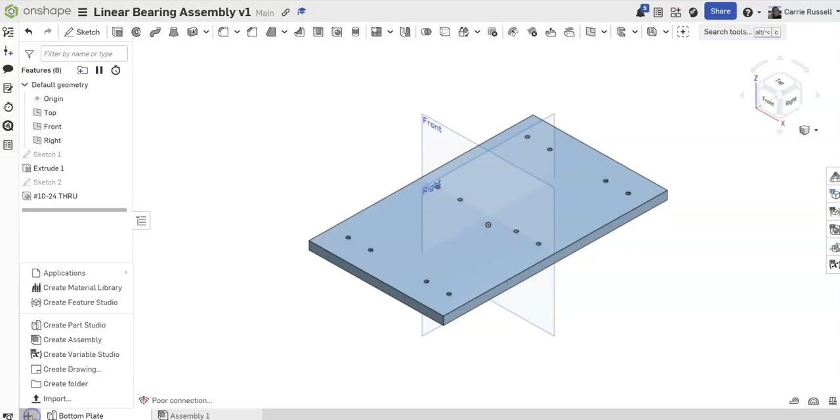Welcome back. We're continuing to work on our linear bearing assembly, and now that we have the bottom plate, we're going to go ahead in our same part. We're going to hit the plus key on the bottom here and create a new part. By the way, we can rename it while we're down here. This is going to be called our guide shaft.

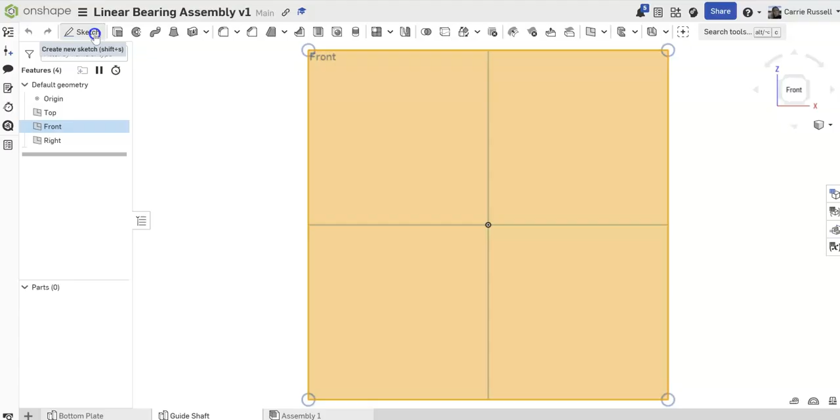This will be kind of the rails that the bearing assembly runs on. We're going to look in the front plane here and create a sketch. We'll go ahead and rough in this part, and I'm actually going to do a corner rectangle here, and we'll kind of see the profile here in a second.

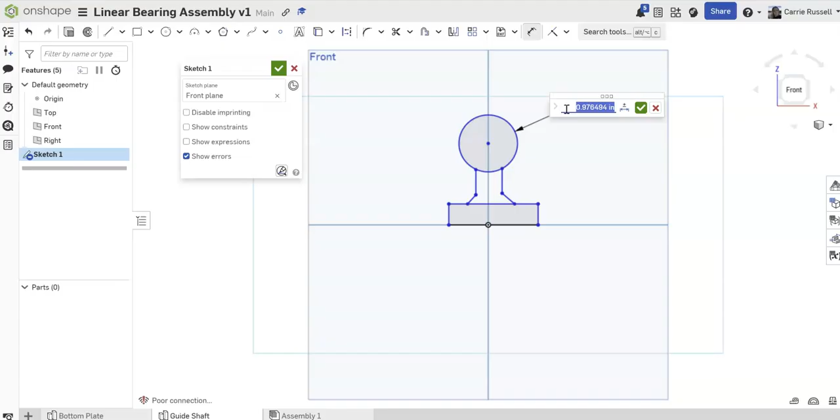Just adding in some features. Okay, so we got a lot of work to make this look the way we want, so let's just make sure first of all that you have some relationships in here. This should have a tangent, as should this. So that means this part should be coincident to that, and these should be coincident. I think that's good. Let's go ahead and give this circle up here a diameter of 0.5.

And we'll start dimensioning some of our part here. The bottom plate, going from the center of the circle to the outside edge here, is going to be 0.75. And then the same will be true on this side as well, 0.75.

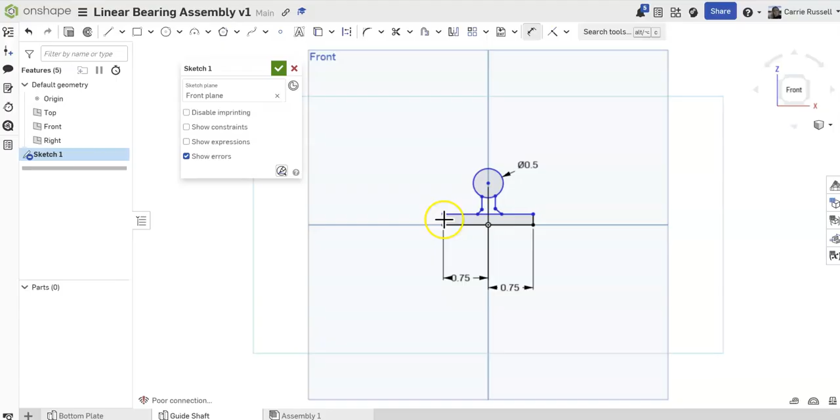This edge here, I'm going to zoom in, is going to be 0.25. Going from the base up until the center of the circle will be 1 inch. Starting to get there now.

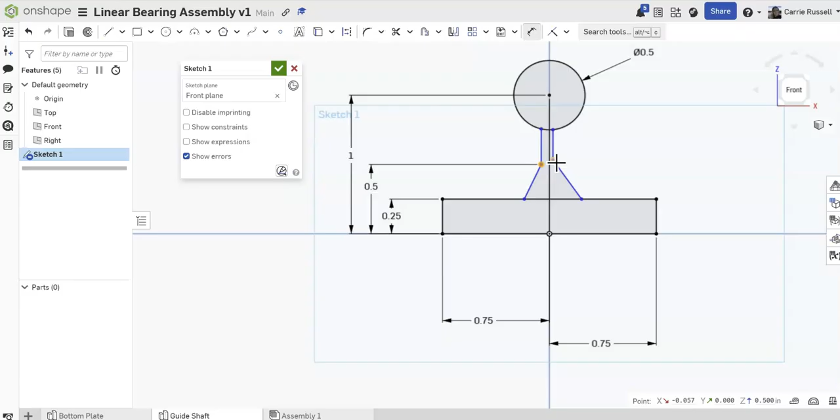And then I'm going to make sure that part here, that those are touching. You can at any time fix some of this stuff as you need to. I'm going to add another dimension from where that angle ends to the base, is 0.5. And we want this part and this part to be, sorry, these two points to be horizontal.

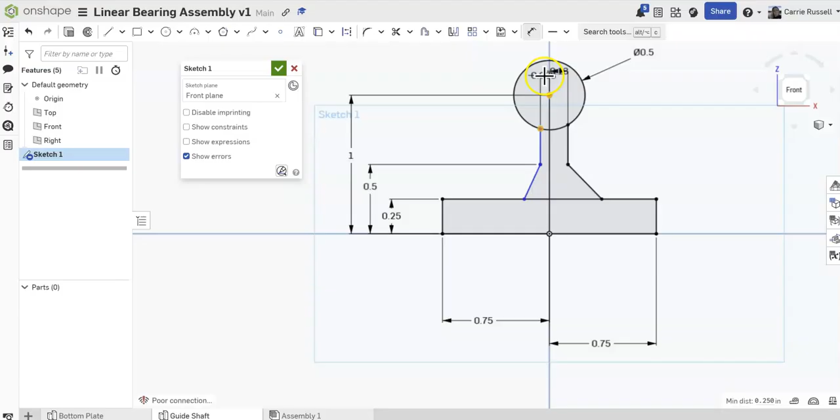We're going to go from, let's put some more dimensions, from the center of the circle to this point. Sorry, I want the dimension here. That's going to be 0.13. Same on this side, that will be 0.13.

As we get close now, we're going to create an angle. So there's a dimension that goes from here to there. That angle is going to be 30 degrees.

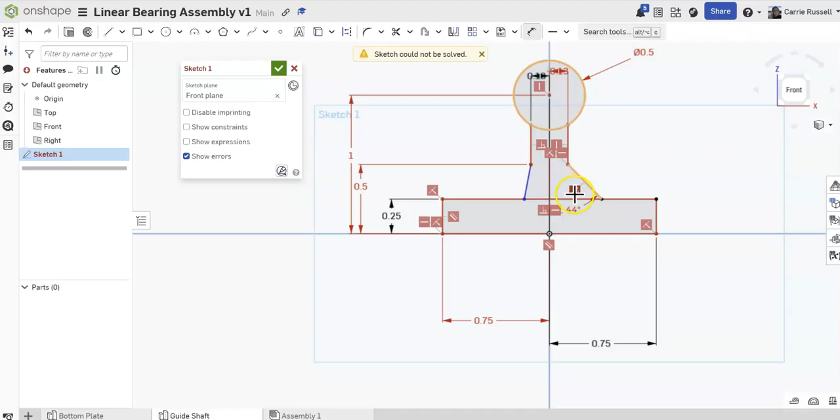See what it's mad about? I think it's mad about this tangent, so we'll get rid of that relationship. But we're going to put the same dimension then from here to that line. That will also be 30 degrees.

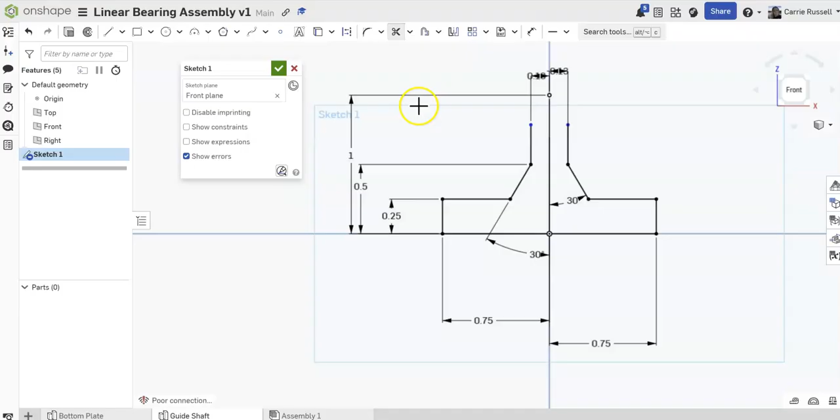And as we're getting closer, we can go ahead and trim out some of these pieces in here, and we'll take a look and see what other dimensions we need. So I think this is all we're going to need to do. Oop, didn't mean to cut that. It's in my tool. I'm just trying to move some of these dimensions out so that you can see this profile.

We're going to go ahead and extrude this shaft. This is going to get extruded 10 inches. And there is our guide shaft.

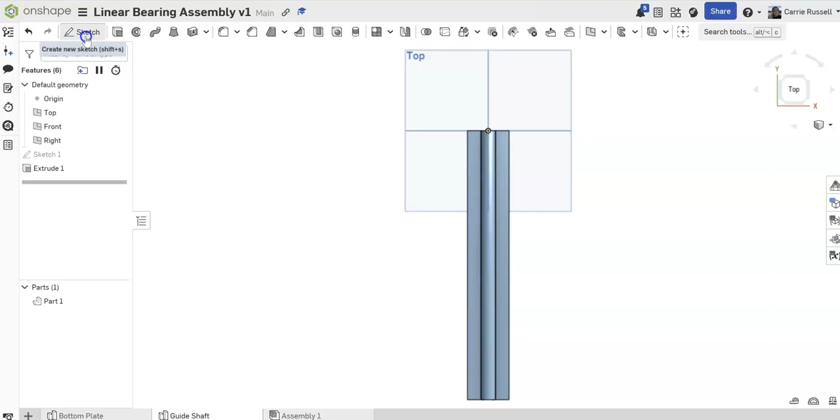And then we just need to drill some holes in this so we can mount that to the base plate. These can be just regular through holes. So we'll go ahead and create a circle pattern here. I'm just going to put one on there now, and I'll go ahead and dimension that to 0.22.

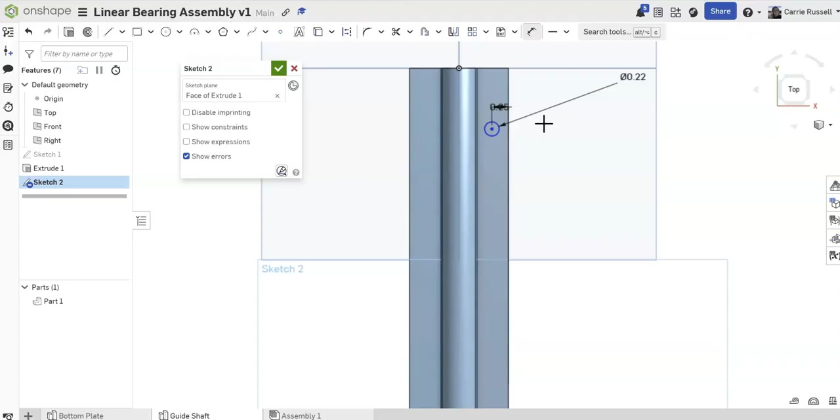And then I'll get a little closer so you can see, this is going to be from the center to the outside edge, 0.25. And then from center to the back edge, 1 inch. And now we can kind of make a linear pattern.

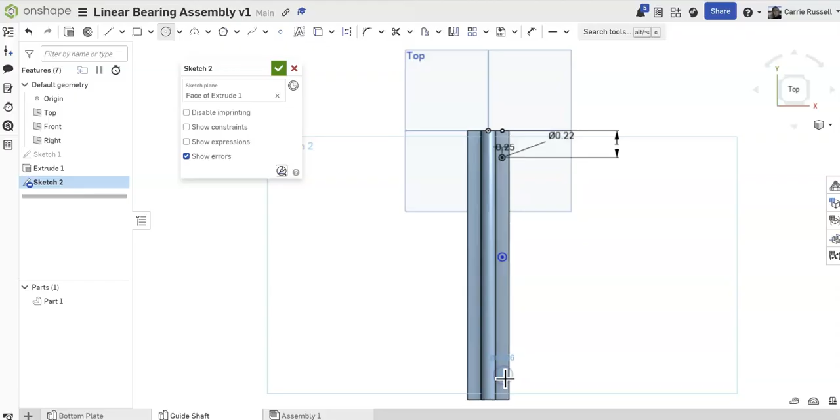We can kind of do the same thing here and here, so let's go ahead and dimension these. Again, this one will be 0.22. We can reflect this over too. 0.22. Both of these should be also.

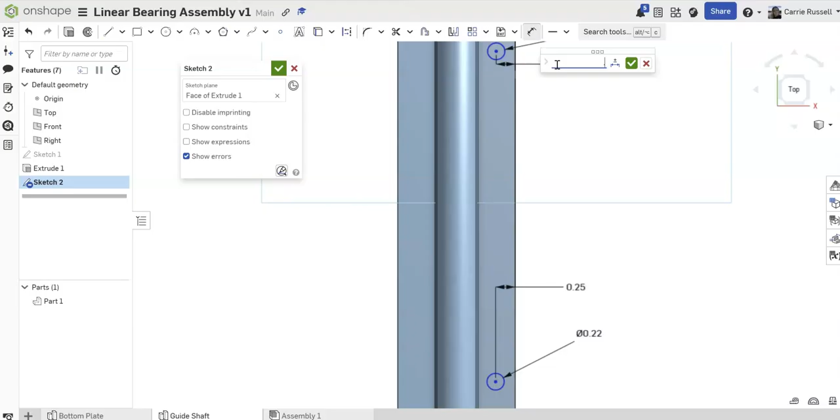And then the dimension between them is actually going to be 4 inches. Let me zoom out so you can see the dimension between this point and that point will also be 4 inches. And then those 3 holes can be mirrored.

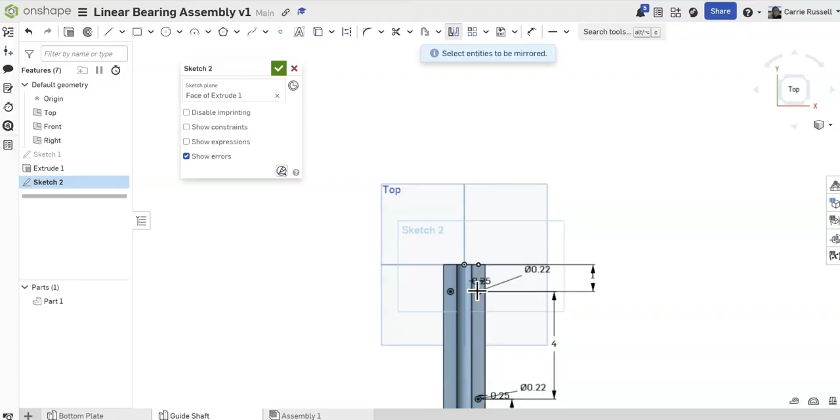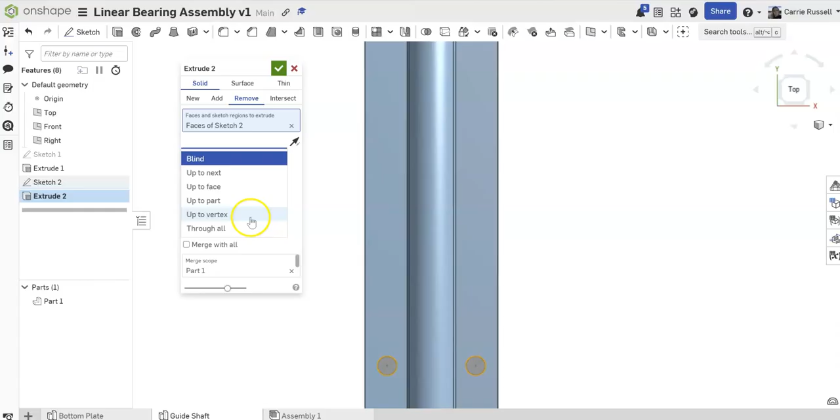Oops, sorry, what's going on here? So there's my first one, my second one. I'm just trying to zoom in because this is kind of a bigger part, and my third one. And once I do those, we're just going to do a remove through all those parts.

And there is our guide shaft. You can submit that and then move on to your next part.